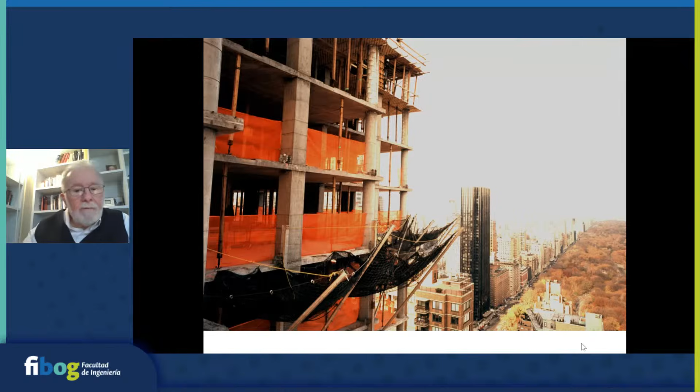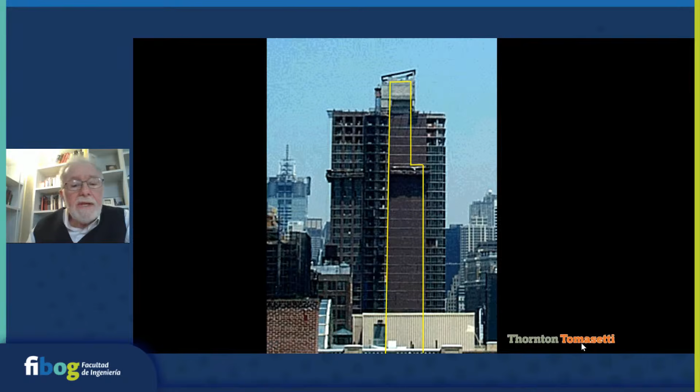But then to go higher, we realized we have to put shear walls into the buildings to resist wind loads and seismic loads, any kind of lateral load.

And also we realize that if you do these shear walls in a closed form core type of situation, similar to the way you might do with steel, shown on the left, you're getting even more stiffness from the concrete. Typically a concrete core will be stiffer than a steel core. But by using the core concept, we learned we can take care of other things such as torsion in the building, as well as loads coming in both lateral directions.

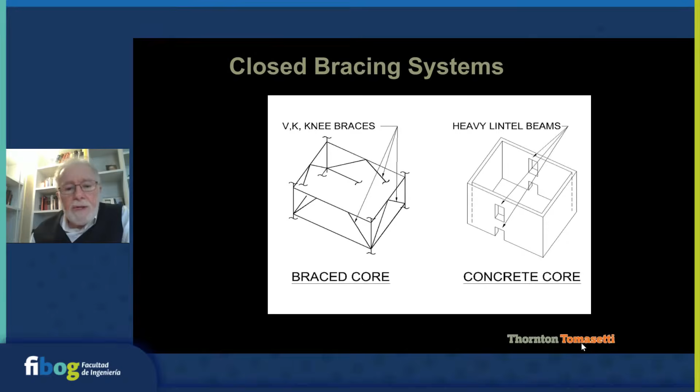But what else do you have to worry about when you do really tall buildings? It's not just a matter of how tall it is. It's the slenderness, the ratio of the height to the width below. Usually if you keep that about 5, you're probably in a pretty good case of saying I don't have any special problems. As you start getting over 5, you start getting into pretty slender buildings, and you really have to take a closer look at everything.

So slenderness is very important, especially when considering wind and seismic. And then the stiffness, and then the period. Even more important is understanding that most of these very tall buildings, the final governing parameter is the acceleration of the building during wind. Does the chairman of the board sitting at the top of the building feel any discomfort? That's what it all comes down to on a commercial building.

Now, if you're dealing with concrete, you have other things to worry about besides the construction technology and cost effectiveness, but creep and shrinkage comes into the equation. So that's something you have to worry about more, and we'll talk about more later. You don't have to worry about that as much with steel. And as I mentioned before, the architectural and the MEP is also extremely important.

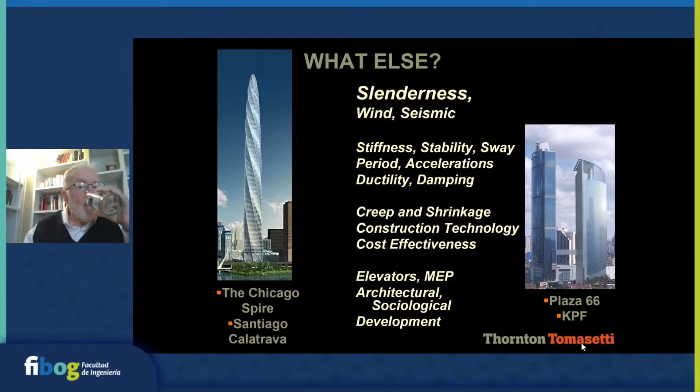There's Plaza 66. So it's later on already.

One of the real interesting things about this project is to show you the change in the state of the art. The Chinese codes had said at the time that any concrete building can't have a sway at the top, a deflection at the top, greater than L over 1,000. That's extremely, extremely severe, a very small deflection. And when you get into 70-story buildings, it's extremely costly to do that. So when we did this building, we had to meet with all of the authorities and convince them that that's fine for a 20-story building, or a 15-story building, but not for a 70-story building.

The governing thing was the actual dynamic behavior of the building, which you can get from a wind tunnel test. And we sat with them, and thank God some of our staff were very, very good at speaking Mandarin. We convinced them that we should do a wind tunnel test, and then from that come out with the actual deflection at the top of the building, which after all was said and done on the maximum load was about L over 500, which is kind of the range that's usually acceptable in these buildings. L over 400 to L over 500 deflection at the top and maximum wind, design wind, is usually what we go for. Actually, it's the 10-year return that we look at for comfort typically.

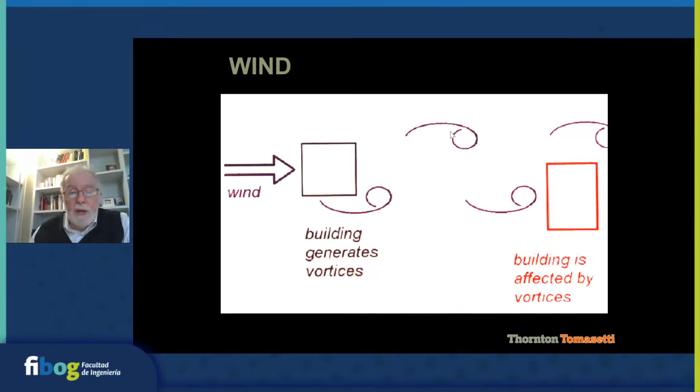So most people think in terms of the direction of the wind is what you're concerned about. But that's not the concern. The concern is the cross-wind effects, and that's because of vortex shedding. You've probably studied fluid mechanics, and air, being a fluid, comes against the body and starts separating on either side at different moments. Those little curlicues, the vortex shedding, create little vacuums, so you get a differential pressure across the building that causes movement perpendicular to the wind. Then when the building moves, that aggravates the vortexes even more, and the cycle repeats, going back and forth. That's probably the most major thing affecting the limitations of your high-rise building in concrete or steel.

Now, one might ask, what about in the direction of the wind? The wind goes at a certain speed and then slows down. Aren't you going to get vibrations in the direction of the wind? The answer is yes, but they're not as critical. If I were in a classroom, I'd ask why they're not critical. The answer is: picture the building moving in the direction of the wind, and then it moves back against the wind—that's a dampening effect. It can only vibrate so much when in the direction of the wind. But when it's perpendicular to the wind, you can get very large vibrations. So when would we have very large vibrations? Picture that the vortex shedding vibration is close to the natural frequency of the building. Then you can get a superposition and a resonance happening that could cause a lot of problems, so you have to design in a way to avoid that.

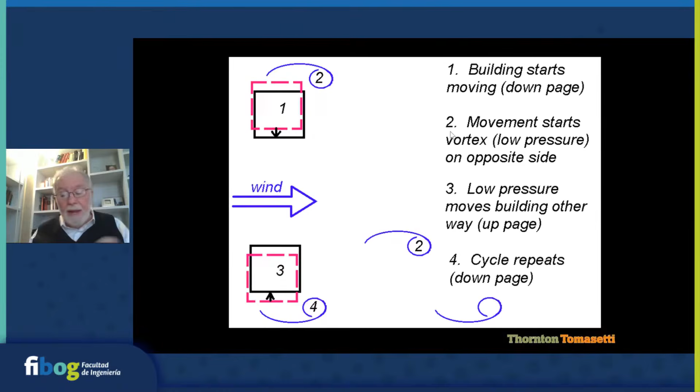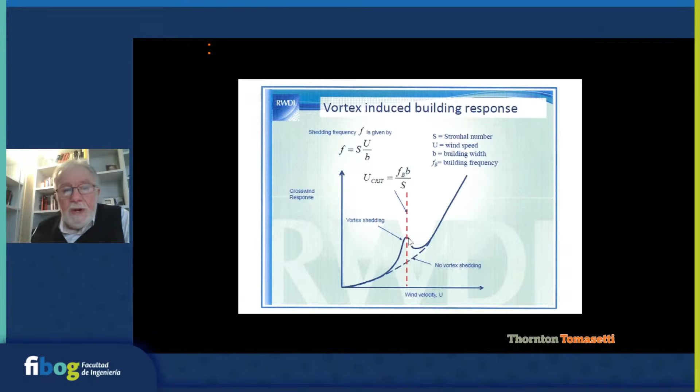If we look at this chart, it plots the crosswind response of a certain project to the wind velocity. You can calculate the shedding frequency, which is F in this equation, times a Strouhal number, times the wind speed, divided by the building width. But the secret is you can't get this S unless you do a wind tunnel test—that's what's really needed to do this stuff properly. What the graph shows: if you solve for the wind speed, at this point on the graph, if you had no vortex shedding, this would be the line of movement. But when you have vortex shedding, if that's at the same frequency as the shedding frequency of the vortexes, you get this bump in the curve—you're getting resonance here. This is what you have to worry about. It's a lot of sophisticated analysis, working with wind tunnel specialists to avoid this and get it to a point where the vortex shedding isn't close to the frequency of the building at wind speeds you expect to come quite often.

So let's keep that in mind as we go further. Now, one might say, let's just make the building stiffer. Well, that doesn't always work—you have to have it stiff enough so you don't get too many problems. Let's look at this simplified equation of motion for acceleration. If you double the stiffness K, the square of the frequency is doubled—this term is doubled. While the deflection is halved, because deflection is inversely proportional to stiffness. Going back to the basic simplified equation, acceleration is A times 2 pi f squared. If you halve the A, but double the 2 pi f, you double the square of the 2 pi f—you're kind of chasing your tail, because one cancels out the other, and it's hard to control the acceleration once you get to a certain wind speed. Give me a second.

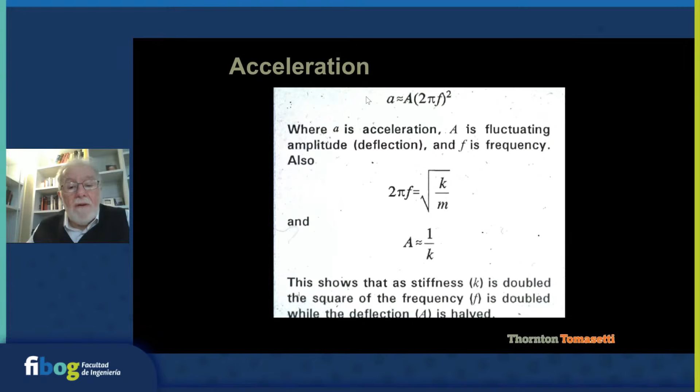But if you would have complete equations of motion here, you'd have some other terms in it, like damping. And it's the damping that can solve this problem. And we'll show you how.

This was a project that we designed and worked on with Harry Weese. My partner, Charlie Thornton, was involved with this. It was a proposed 2,000-foot tall building in Chicago. At the very top of this project in the wind tunnel, there was a neoprene rod with a weight that could slide up and down. By sliding that weight up and down, it acted like a tuned mass damper, so we could control the damping in the model.

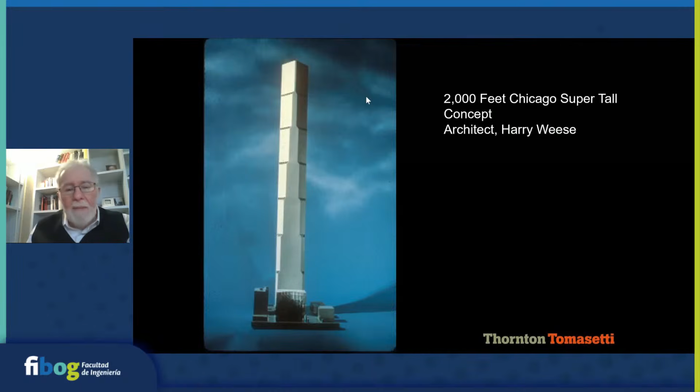So by studying this and controlling the damping in the model, let me show you what we learned. If you look at this wind velocity versus the peak deflection, if you don't have the TMD activated, the tuned mass damper, you can see at the design speeds, before the 10-year return, we usually look for comfort at the 10-year return speed. But before that, we got very, very high deflections, or could have been accelerations. The curve works for either one.

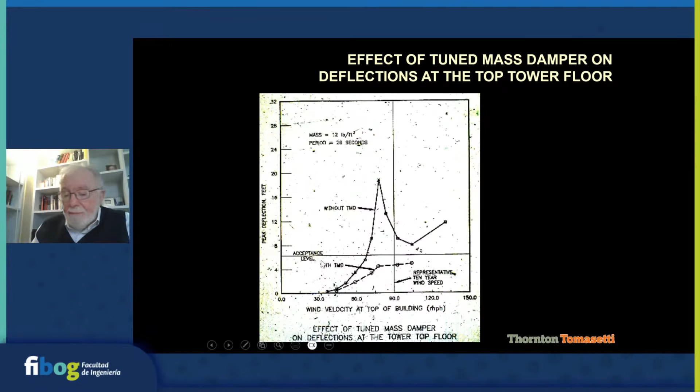And when we move that tuned mass damper on the model to increase the damping, we got all the way down here, which is below the acceptance level. So now let's look at putting in a percentage of damping.

So the high point had a percentage of damping of 0.01. Then we changed the tuned mass damper and gave a percentage of damping of 0.02, that's 2% critical damping. I think most of you have courses and understand what critical damping is. The other one is 1% critical damping. So that's the importance of this curve: tuned mass damper at 1%, you're all the way up here for the acceleration; tuned mass damper at 2%, you're all the way down here, almost at the acceptance level.

Now, what's the significance of this relative to our conversation? A typical steel building intrinsically has 1% damping. A typical concrete building typically has about 2% damping. This is one of the major reasons why we're seeing concrete being used on very, very tall buildings, because the inherent damping is much higher than that of a steel building.

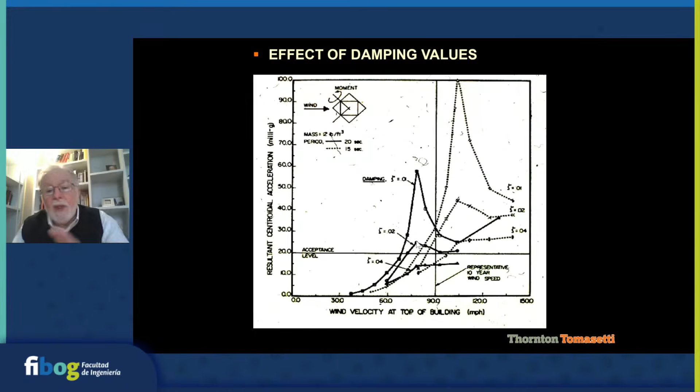Most steel buildings that are extremely high, like some of the tallest buildings in the world, such as Taipei 101, I'll show you a picture of that later, require very sophisticated tuned mass dampers. Yet currently, the tallest building in the world, in Dubai, done by SOM, does not require a tuned mass damper for the overall comfort of the building. That's one of the main reasons why concrete is good for tall buildings and has become popular.

Now, I'm going to leave you with that thought. And if you would all just understand, I'm not getting any younger, okay? I've got to leave the screen for just 2 minutes, and I'll be back.

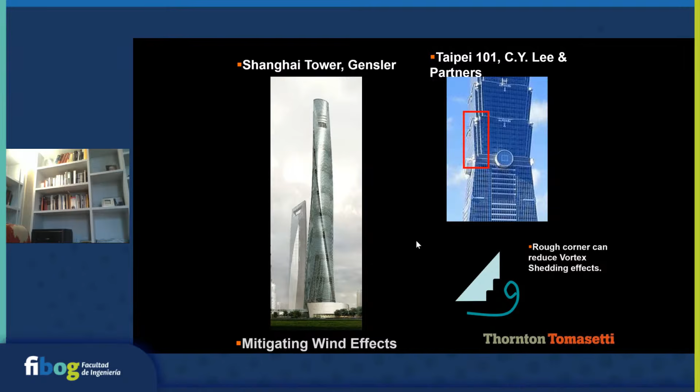Okay, sorry about that. I trust you can all still hear me. If you can't, someone should send me a text. Okay, Mr. Tomasetti, continue. Okay, thank you so much, I'm sorry for the interruption.

Now, before we go any further, I just want to mention that the other major thing that happened around the 70s is we started getting into really high strength concrete. In earlier years, when you thought of concrete for tall buildings, the strengths were such, like using 5,000 PSI concrete, I think that's 30-ish MPa or something, you'd have these humongous columns at the bottom of the building, which knock out the architecture, so to speak. But as we start getting into higher strength concretes like we have today, where we typically use something like 10,000 PSI, and on some very tall buildings we're using 14,000 PSI concrete, which I guess is 70, 80 MPa.

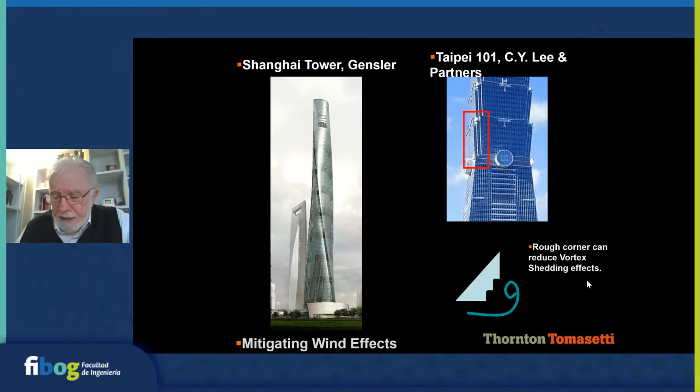This is a perfect example of integrating engineering and architecture. You see this in many buildings, even going back to Gaudi's design, Sagrada Familia—the roughness of the building helps, the fact that the building is changing its shape as it goes up. You see it in the Petronas Towers, and you see it in the Kingdom Tower, which is under construction now and will be 1,000 meters high—yes, I didn't say feet, I said 1,000 meters high. I'll show you more on that in a few moments.

So that's another reason why, for both steel and concrete, we can go higher as we learn how to integrate the architecture with the engineering to give an aeroelastic design, so to speak, that minimizes the synchronicity of vortex shedding. The frequency varies a little bit as you go up the building.

But there's one more thing I forgot, and I bet some people in the audience don't even realize this: as you increase the strength of concrete, you also increase its modulus of elasticity. So it gets stiffer, and that also helps in using it for tall buildings.

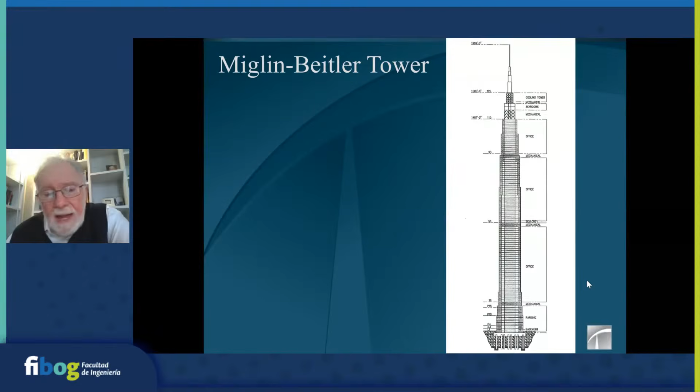Many years ago, we did this study with Cesar Pelli, the Miglin-Beitler Tower. My partner, may he rest in peace, Charlie Thornton, was very proud of this project. It was a study—I think almost 2,000 feet to the top of the building—to see how we could get it to work in concrete.

What came out of that study was the realization: forget columns and shear walls—let's just use walls. Concrete wants to be a wall for high-rise buildings. You can see with this section that we had these massive walls, but they didn't take up that much room at the bottom of the building because of the way they were oriented. This has become very popular now, and I'll show you with current very high-rise buildings that even though this one wasn't built, this kind of effect was taken.

With the present tallest building in the world, done by SOM with Bill Baker as the structural engineer, they came to the same conclusion and used this wall concept in their design.

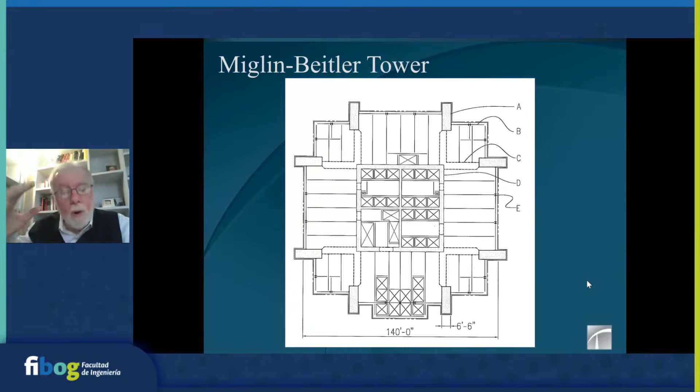Like I said before, we put this in a wind tunnel study to get all the parameters we needed—basically you have to know the different mode shapes. The three most important are translation in one direction, then translation in a direction perpendicular to that. You see that here as Y and X.

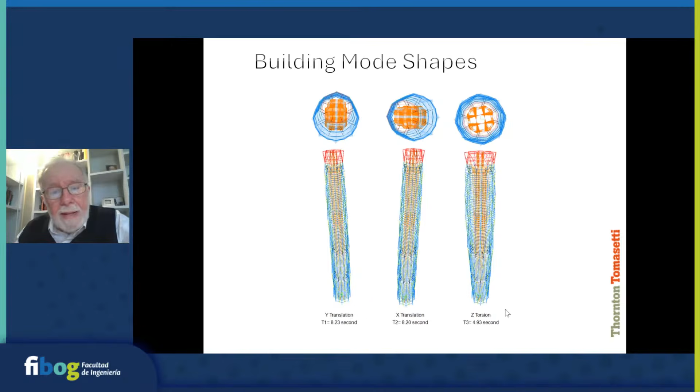Something can also vibrate in torsion, so you have to be aware of both. This is what you get out of the wind tunnel test, and you use this along with testing for damping.

This is an example of a wind tunnel test done on another project, the Chicago Spire—unfortunately this never got built. Basically, if you're not familiar with wind tunnel testing: you build the model, a static rigid piece, and put it into the wind tunnel. Then you simulate the surrounding areas close to it, and in the back area you put a kind of roughness that simulates whatever else is near, but not too near.

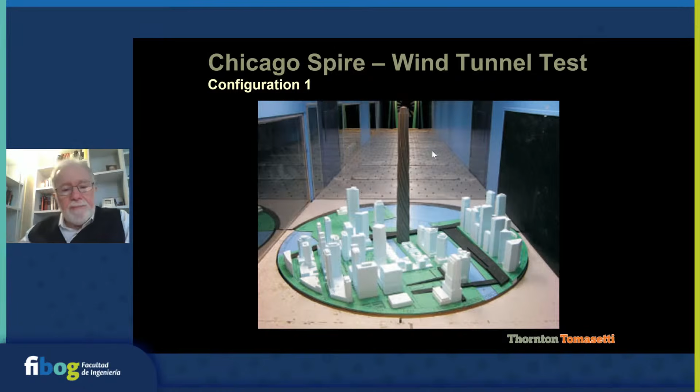Through using these wind tunnel tests, along with the initial calculations given to the wind tunnel designer based on the frequency, stiffness, and everything about the building, you can come up with the acceleration of your project. And there are restrictions on acceleration.

So, for example, if you look at this chart, in North American practice for the 10-year wind, which is one of the most popular ones you look at, for a residential building, you want to keep the accelerations in the 15 to 18 milligee range, no more than that. Hotel is kind of similar. And in an office building, you can keep the accelerations slightly higher, which is a good thing for steel, because steel works well with office buildings, and you can get a little higher acceleration there. But not if you're going to go to 1,000 meters, that's for sure.

And the reason for these differences is that in a residential, you're sleeping, you're laying down on a couch, you're relaxing at home at night, and everything's very quiet, so you're very sensitive to any accelerations. In an office building, you're running around, you're busy, you're working, people interacting with each other. They're less sensitive to the accelerations, so you can have more. These are all the things that typically are the final governing thing on a very, very tall building.

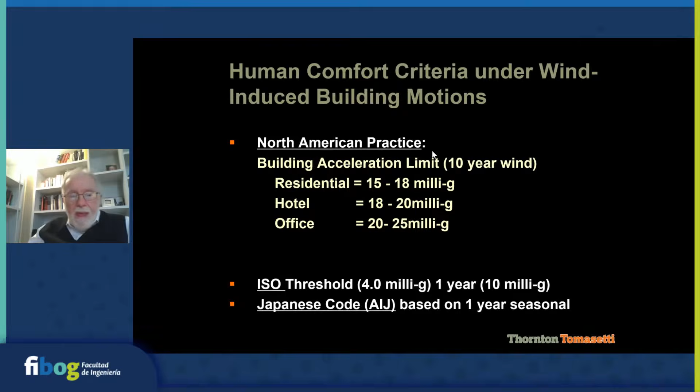Now, just very quickly, if you do need a tuned mass damper, there's various ways of doing it. There's like a single pendulum that goes back and forth, in the opposite direction that the building wants to go, so it causes a resistance. This happens to be a picture of the brass colored steel on the top of 101 Taipei. And it really is like a thing to see. That building's all steel primarily, and they actually use it for a show. People can go up there on a windy day and watch it move back and forth.

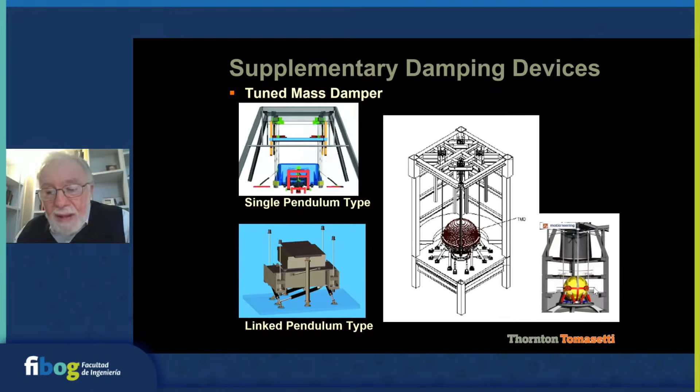Now, let's look at some of the real current things happening. This is the building we're doing in Saudi Arabia. Its total height is going to be 1,000 plus meters, and you can see how it's tapering on the way up. And you can see that the cross section at every level is different, so you don't get this coherent vortex shedding that I was talking about before. The frequencies of the vortex shedding change as you go up, so you get less reinforcement.

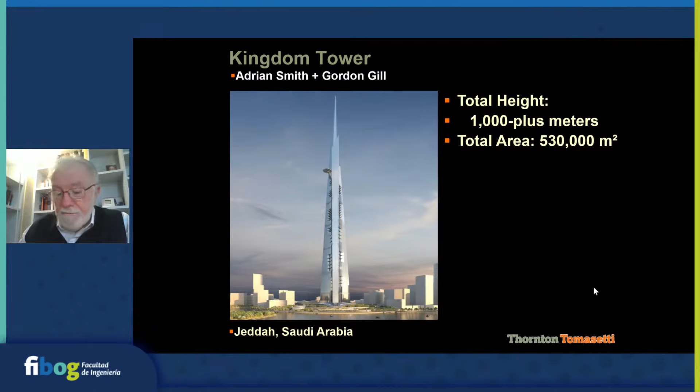And this will show you that the height to width aspect ratio is 12:1 for this building. Remember what I said, if you're like 5:1, you probably won't have too many dynamic problems. Well, this one breaks many of the records, as does Burj Dubai, which is the SOM building, currently the tallest building in the world.

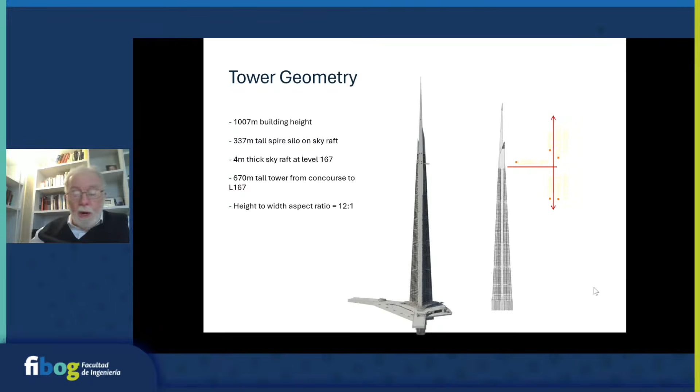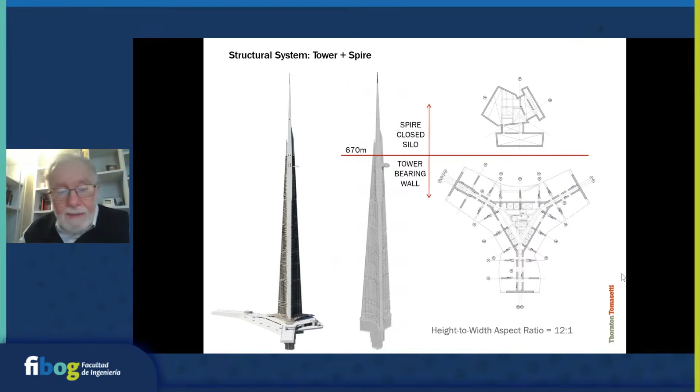But now look at this. This is a cross section showing the basic construction, and you can see, it's what we talked about before, it's walls. You don't see any columns. There's no columns, the walls act as walls. They act as shear resistance, and the walls are the columns. It's all walls and columns, and that's how the project was accomplished.

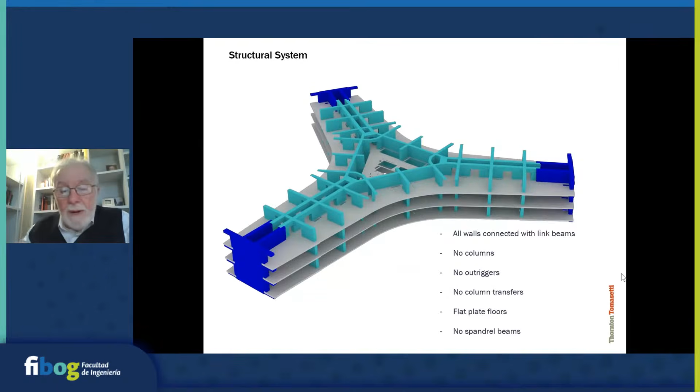Very, very simple construction. Now, I would be a naughty boy if I didn't give some credit here to our contracting friends, because they have made a major contribution, and the people who make the concrete equipment. There's been great advances in the pumping of concrete that have allowed these very tall buildings to be built. You know what concrete is like, it's kind of a very heavy thing. Just picture bringing it up several hundred feet or more. You need good pumping technology, and that was another advancement in the industry, which helped in making concrete more popular for high-rise buildings.

And here's just an example of how you do this. You don't need the high-strength concrete everywhere. As you can see here in the foundations, it's only 9,000 psi or 60 MPa. At the lower levels, you see 12,500 psi or 85 MPa, and near the top, it's only 11,000 psi or 75 MPa. So you can use the different strengths of concrete at different parts of the building to economize your project as much as possible.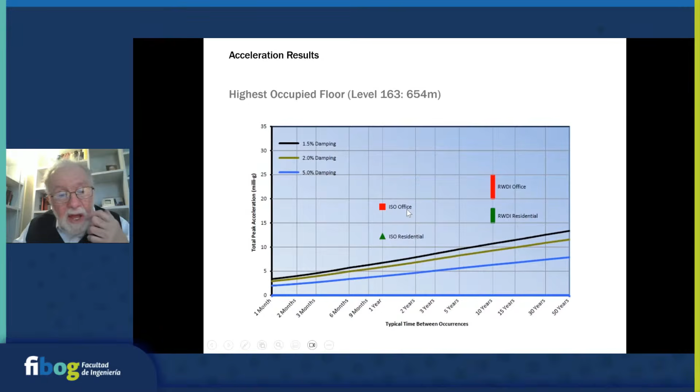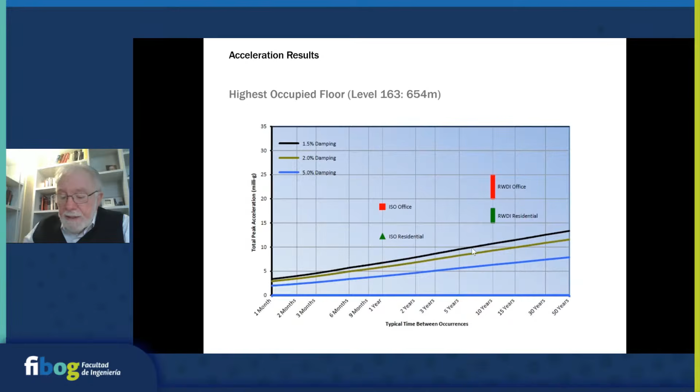This is some of the criteria for office by international standards, and for residential, so it's well within that. RWDI is a very well-known wind tunnel consultant. They have their own studies where they feel you can go even higher in some of these projects. But this project we're talking about here, whether it's 1.5% or 2% damping, we're well within those requirements to maintain the comfort of the building.

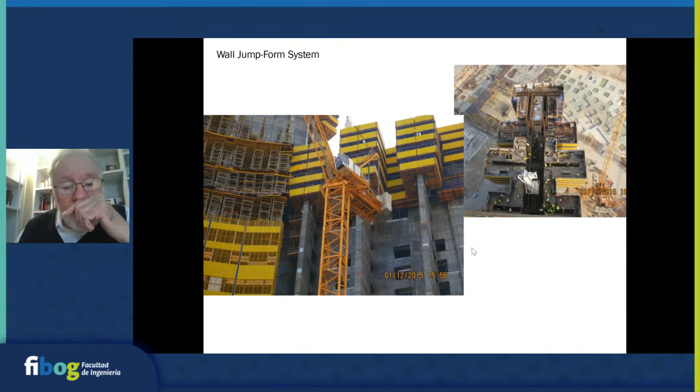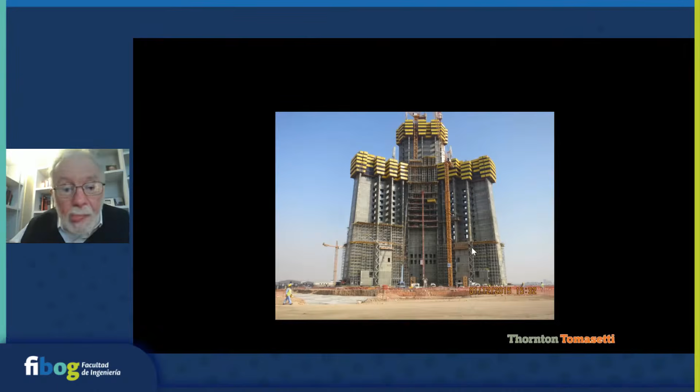And here you can see the building being built. It stopped for a while. This is in Jeddah, Saudi Arabia, using jump forms going up. Very repetitive. In one way it's a complicated design, but what you want to do is have a very complicated, sophisticated analysis -- that's what we do as engineers -- to come up with a very simple construction approach. This is very repetitive as it goes up, using jump forms. I think this is pretty current, it's a little higher than that. They've gotten back to building the building, and maybe within a year or so it'll be completed. I don't recall the exact date they have for completion on this.

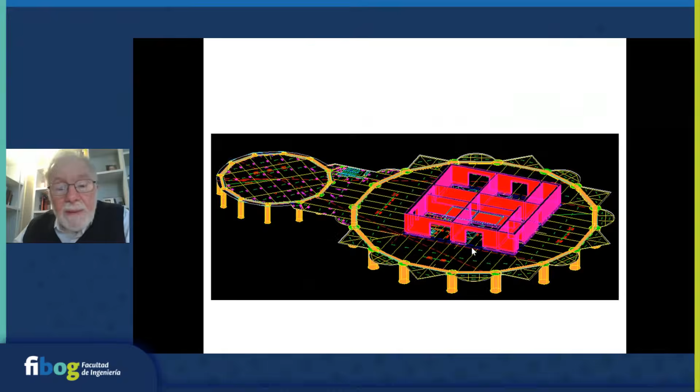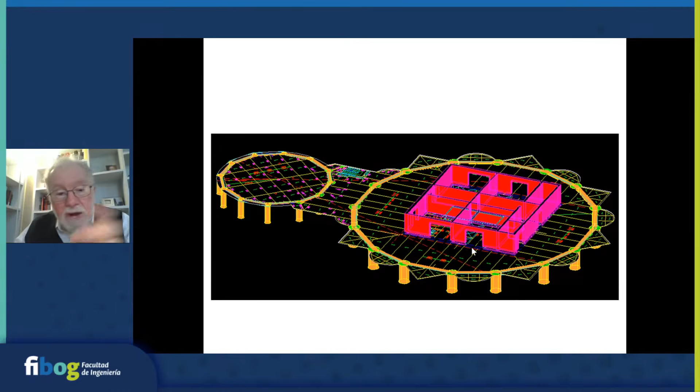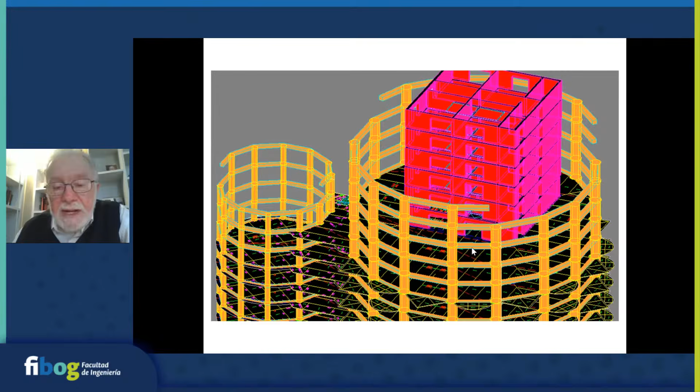Now, another interesting thing about concrete, it's very friendly. It doesn't mind working together with steel. And KLCC, also known as the Petronas Towers, which we did -- at that time this was the tallest building in the world when we did it. It's basically a concrete frame around the outside and a concrete tube on the inside. Here we actually did use columns for a variety of reasons, it made sense with the architecture. So this shows the project going up. Each one has a little building on the side, and then there's the main building.

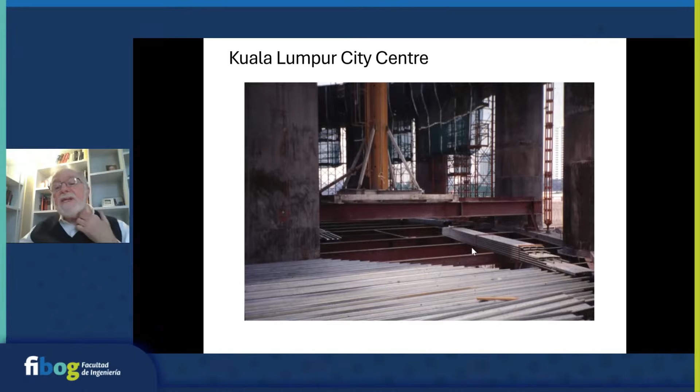But what's interesting here is that it was combined with steel. Because there was a lot of office space in this building, steel has certain advantages on the floors. You want to break through, you want to hang air conditioning, you want to do all sorts of things in an office building that you don't do in a residential building, and steel makes a lot of sense there. But you don't have to do the whole building in steel to get those advantages. So this shows concrete as the main primary structure, and all the floors are done with steel and standard deck and concrete topping on them.

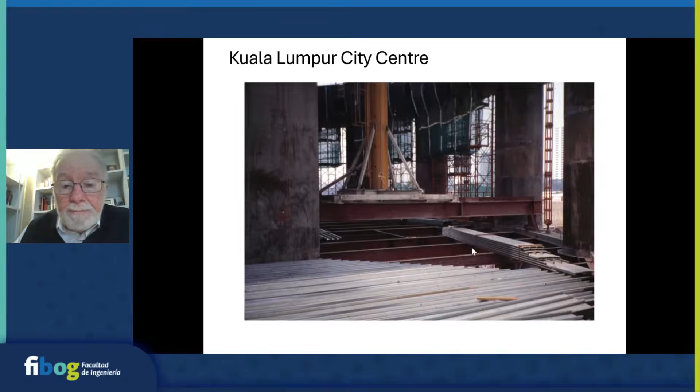And the other smart thing that the owners did here, they picked two different contractors. So for each of the buildings it became a race to get to the top. One contractor couldn't come in with excuses, asking for extras, unless the other contractor did. So each one was trying to show that they were doing a better job, and it worked out very economically for the owner. That's kind of an aerial view looking down on it. What you can see from this view is the roughness, so to speak, of the outside, and how that really helps break up the vortex shedding to reduce the amount of damping that's needed.

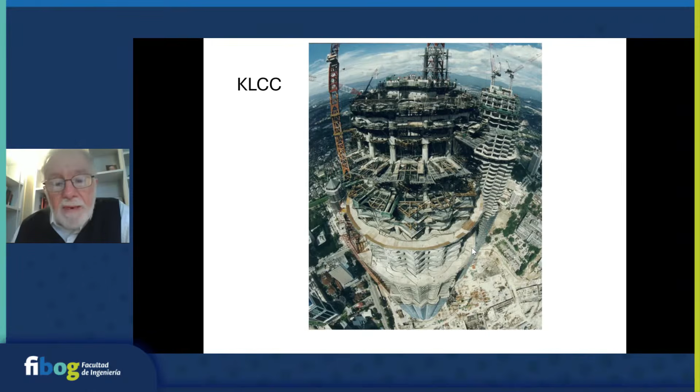So as you're building this, the concrete, as it's curing in the center, is like tightening up. It's deflecting, it's getting compressed, and it's creeping. Steel doesn't creep -- steel only creeps at very, very high temperatures, and we leave those problems to the people in aerospace when they're re-entering or something. So one disadvantage with concrete, especially if you mix it with a steel frame around it, is it creeps, and you can get differential shrinkage at the top of the building, and differential creep between the core and the steel on the outside.

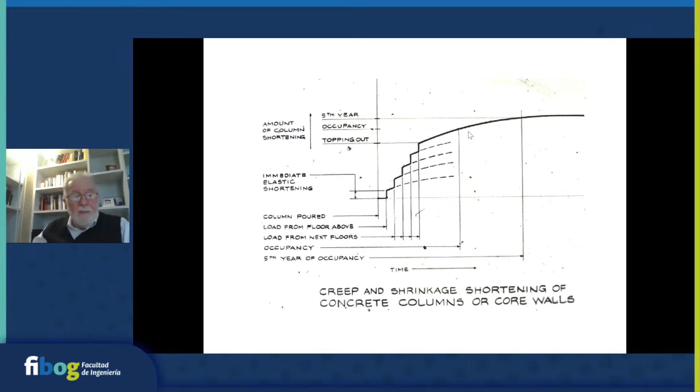Now, the other interesting thing is that it goes on for a long time, so you've got to get this to a point that it's not a problem when you leave the project. And the way that's done, which this little cartoon shows, is creep compensation.

While the project's under construction, you have to work with the contractor, and you design the project so that the core is slightly longer than it has to be compared to the steel columns on the outside. So as you go up, this is creeping down, and eventually they come to the same point. Unfortunately, the C executive at the top might still be disappointed with this sketch, but we'll blame the draftsman for that, because it's not exactly flat, but it should be. This is how you avoid this problem, using creep compensation as you go up.

Now you might ask, if the building is all concrete, do you also have this problem? Some will say, well, no, it's all concrete—why would you have a differential between the outside frame and the core? The answer is, when you get to very, very tall buildings, you do have this problem. The reason is that even if the stresses that are there all the time are a little different on the outside and the core, those constant stresses are the ones that give you creep. Stresses coming from wind don't give you creep—it has to be there constantly. That's one contribution to this.

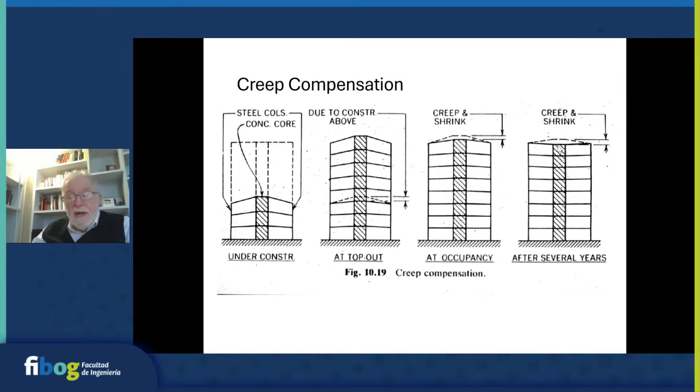And this takes a lot of cooperation between the engineers, architects, and the contractors. But not to blow the horn of concrete too much, which I'm sure ACI—you're a group associated with ACI—loves, I got to live with the steel people too.

So I want to end by saying there's always a place for steel and there's always a place for concrete. And bless these two industries, they really know how to compete with each other. Their competing with each other has caused tremendous advancement in the art of design and construction that allows us to do so many of these beautiful projects. It's not just a matter of the architect and/or the engineer—it's the fine work that the suppliers are doing, the subcontractors are doing, and the general contractors are doing, and the equipment makers are doing, such as pumping of concrete, that make all of this possible.

Whether you're Eiffel and you choose steel, or you're SOM and you choose concrete, as was chosen for the current tallest building in the world, Burj Khalifa, you wind up with a good design because of all of these parameters working together. So at this point, I think I've covered all the things I want to talk about.